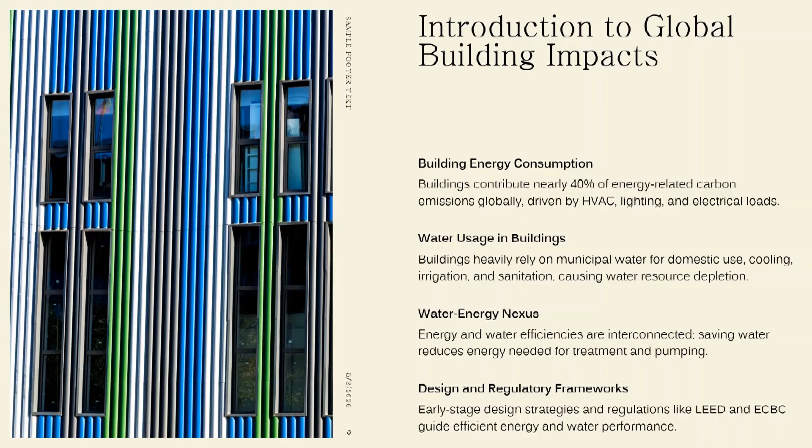Now, if we go to architectural design, Dr. Madhuraj Yadav, my fellow panelist, this is her domain, passive design. Architectural passive design can use natural ventilation, natural lighting, and other measures like a lower U value of the wall, and if the window to wall ratio can be reduced, that can substantially reduce the heat through the building envelope. All these things with strict compliance with the ECBC directives, as Suresh sir has already mentioned, and high performance envelopes.

Just as an example, a U value of 0.44 watt per square meter per Kelvin can yield up to a 75% reduction in heat gain compared to conventional walls. This is also an interdisciplinary area to focus on.

We can decouple the heat from the light by utilizing double or triple glazed units with low emissivity coatings. And for active MEP systems, we deploy high coefficient of performance chillers with variable frequency drives. That is also very, very important.

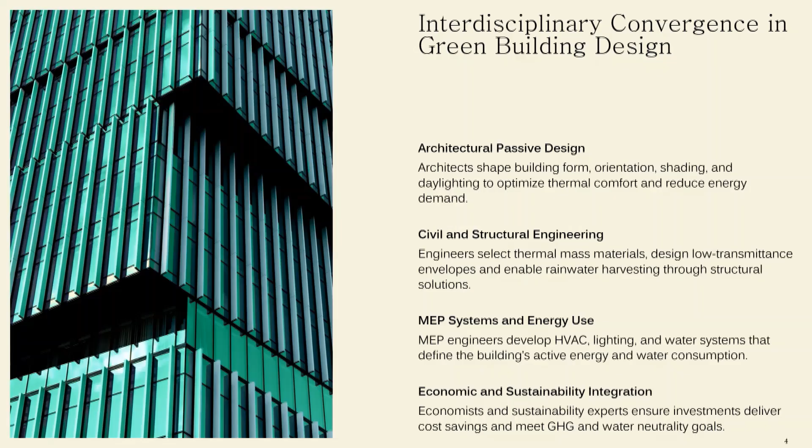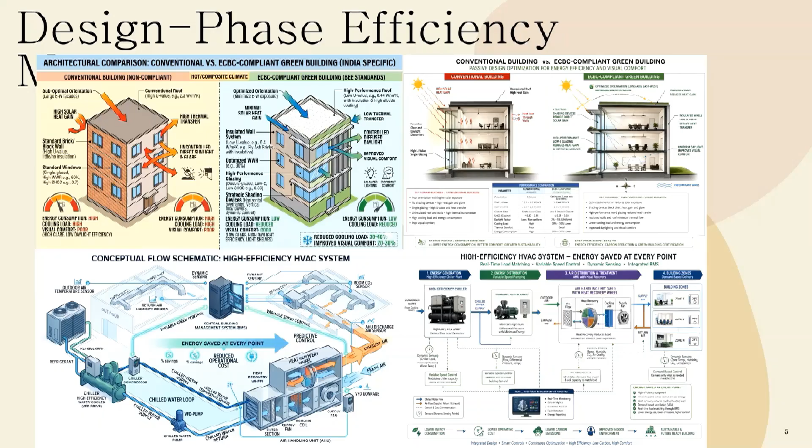Now, being a mechanical engineer, when I joined IBC, I was a bit skeptical about to what extent I would be able to contribute. But later on, I have seen so many mechanical engineers under the canvas of IBC, like Onkar and many others. So now coming back to this.

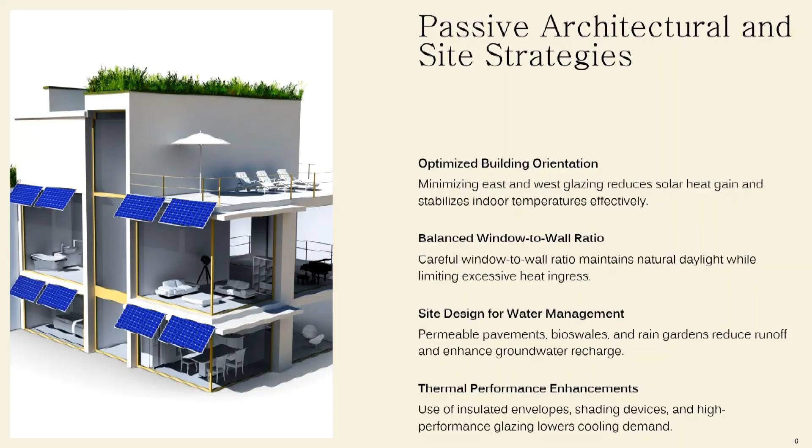Energy efficiency, entering into the subject of civil engineers: Dr. Anil Joseph has given an excellent presentation, and Dr. Manoranjan Mishra in the first session. Entering into their subject, there are a few things we need to see, that is, how this can be minimized during construction.

2 minutes, please. Yes. The construction phase is traditionally resource intensive, but usage of efficient dust suppression and recycling of water, and also eradication of diesel-driven construction power, can also reduce the energy consumption.

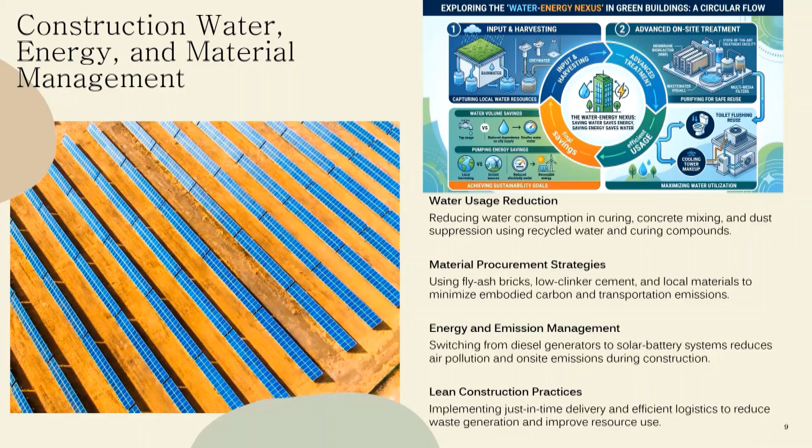Now, water use as a lean construction practice. Of course, our Dr. Manoranjan Mishra is an expert in this subject, so that can also reduce the carbon footprint of the construction.

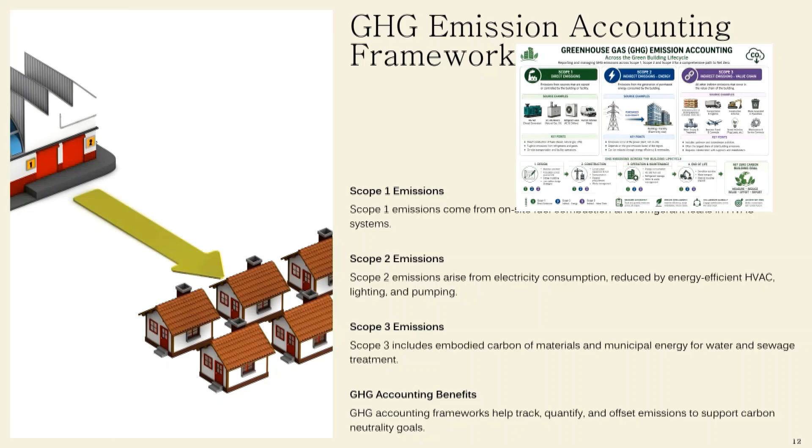Now, one part is the accounting of greenhouse gas emissions, that is scope 1, scope 2 and scope 3 emissions, because even in the operation of a green building, or before that, the construction of the green building, scope 1, scope 2 and scope 3 emissions can play a significant role in reduction of the emissions. And these accounting practices must be integrated not only in the design phase, but in the operational phase as well.

Now, coming to the integration of technology with BIM, building management system, IoT, and finally AI, because today everything is evolving around next gen technologies. So an integrated building management system can play a very significant role in monitoring the entire life cycle of the asset. Many of you might be aware that IBC has already drafted a handbook on BIM.

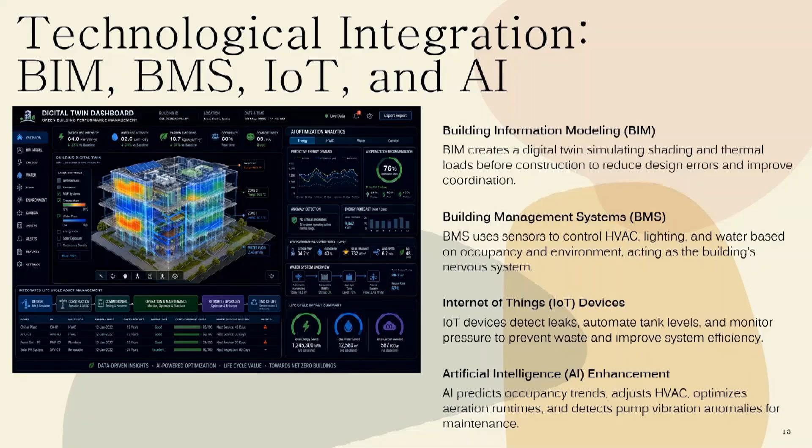Now finally to the economics part. In the case of energy efficient green building design, construction and operation, the initial capex may be a bit higher. But ultimately, we can leverage reduction in building energy consumption to the extent of 30 percent and water cost to the extent of 50 to 60 percent.

Dr. Anil Joseph in the first session mentioned a very important point: maybe the next world war will be over the global water crisis. So, combining these effects, the payback period is not very high. It can be achieved within a payback period of 3 to 5 years.

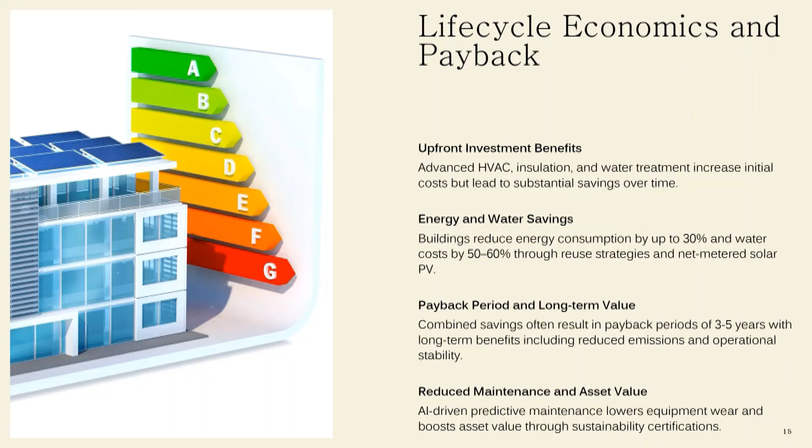And it can also lead to reduced maintenance and enhance the integrated asset value, because our main focus at this point of time is a life cycle asset approach, not only the initial investment. So these are basically the conclusion and the sustainability roadmap. Please conclude. And thanking you all for this.